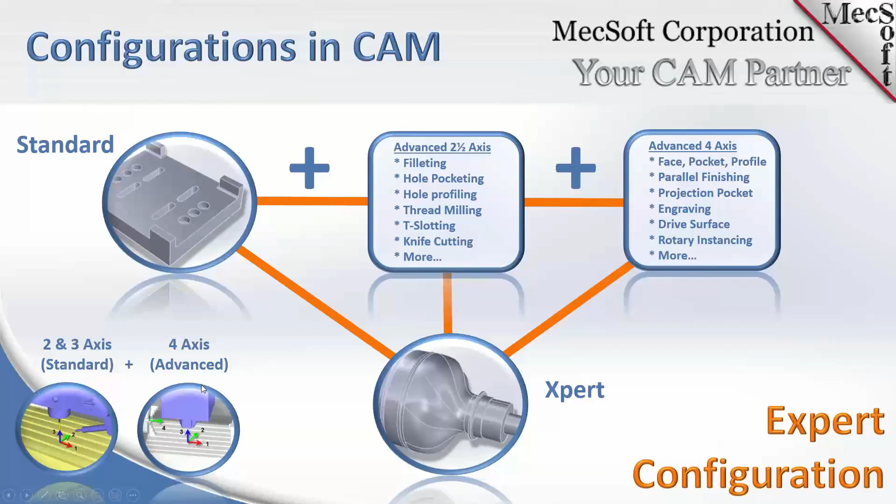So in expert, you get standard plus additional features that are in the expert configuration. Standard down here on the left, add to that 4-axis expert configurations. In expert, as we mentioned, you can cut radial parts, 4-axis parts.

Here is a typical 4-axis part that you would want to cut. I mean, you're saying radial, but typically people understand it as rotary parts. So if you have a rotary axis, then you'll be using this module.

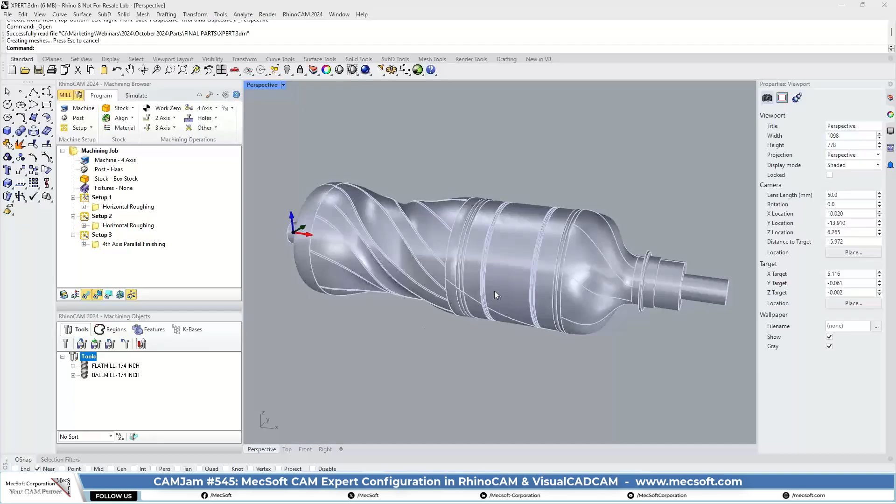So you can do some roughing, and these are indexed operations — we call that 4+1. We've got the parallel finishing with the continuous, that's the 4, and then these 3-axis operations refer to that as 4+1, or indexed 4-axis.

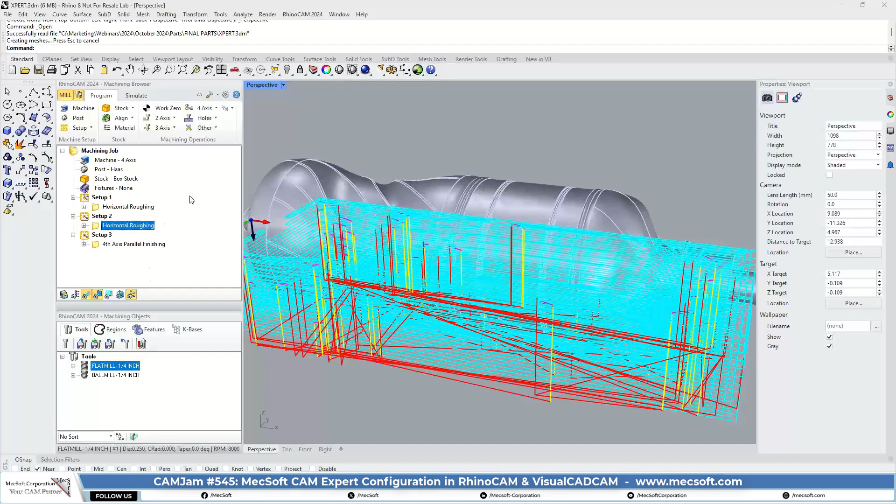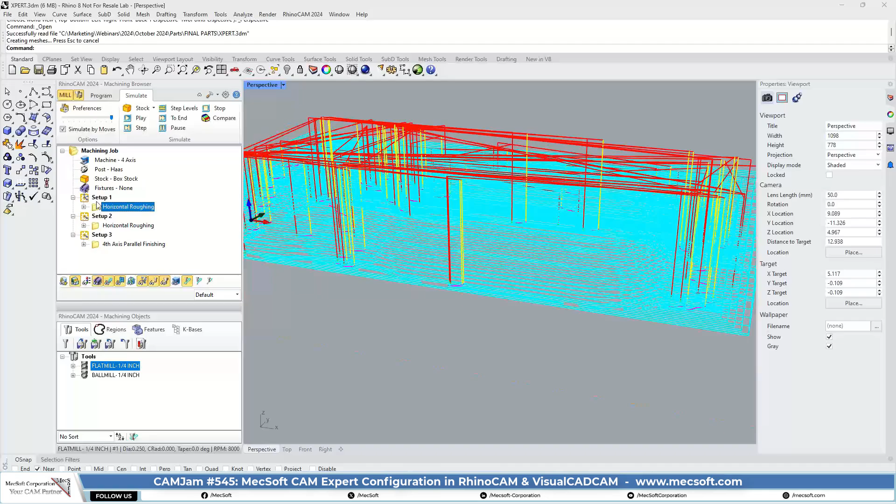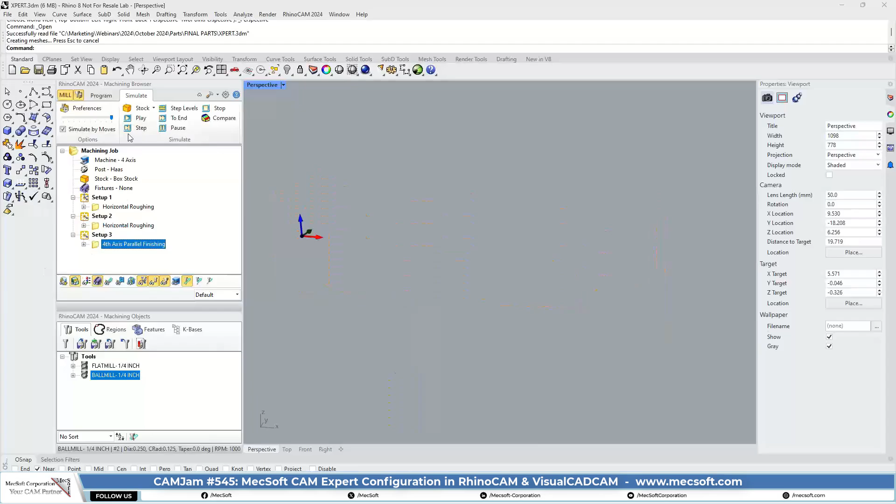Do you want to run the simulation real quickly on this to show it? Yeah, we can do that. So what we're doing here is we're actually locking the axes in the first setup, machining the top, and rotating the table to expose the bottom part, then roughing that, and finally doing a rotary finishing, complete continuous rotary finishing. So that's the top half, then we're roughing the bottom, and finally doing the finish, rotary finish.

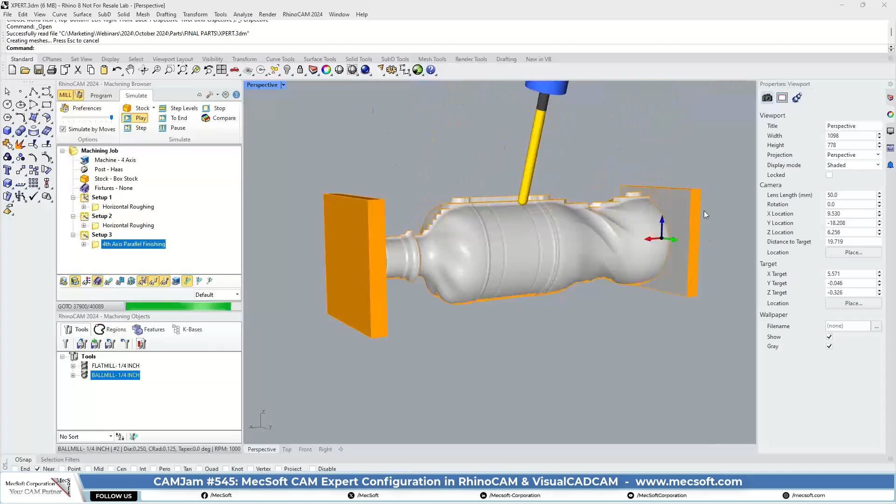And again, these lines you see are just in the simulation. Let's go back in here and turn these off.

So that's 4-axis. This module you'll be using for parts like this — people use it for table legs and machining, things of that nature. Anything that's rotary but has milling features on it. For instance, those little grips that you have on this bottle — obviously you can't run it on a turning machine, so you'll have to use a 4-axis milling machine. That's where this module will be used.

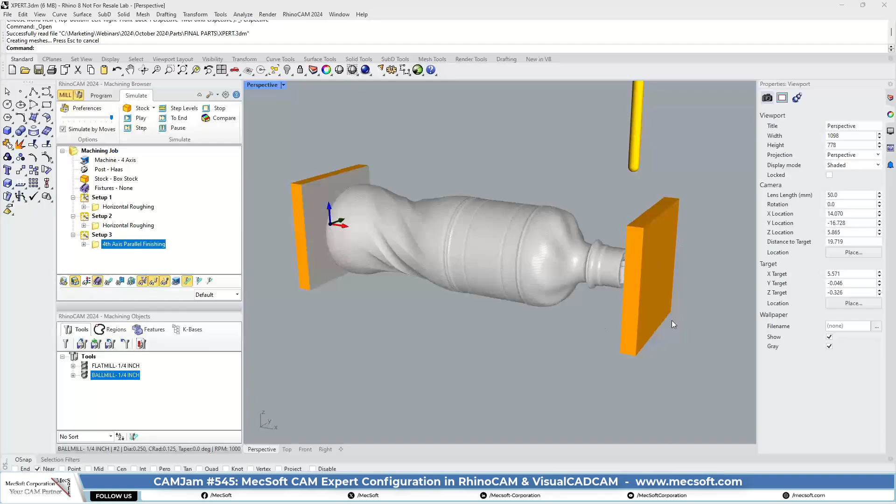So thank you, Don. Let's go over the menus real quick. Basically the same stock options, these are the same. In 2-axis, you actually get knife cutting — I don't think that was in the Pro or the standard. So you get additional knife cutting, hole profiling, and hole pocketing. If you need to machine very accurate holes, these are the two operation types you want to use.

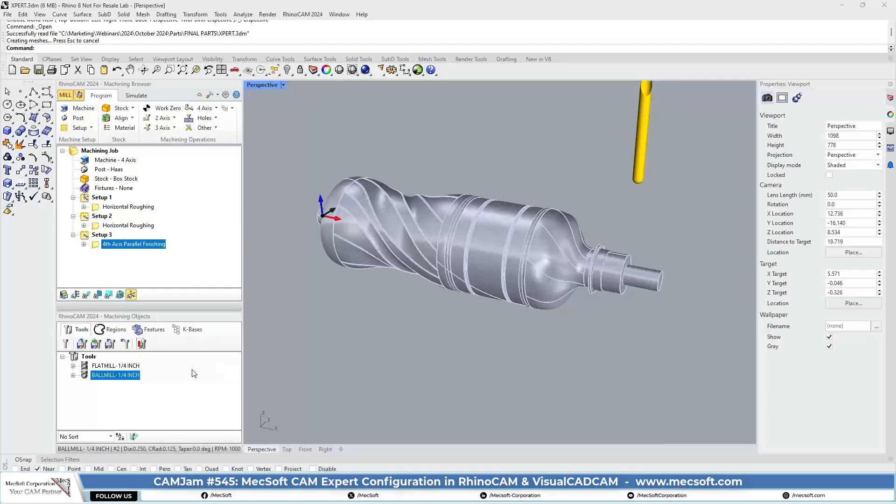So you get the basics of the standard 3-axis operations that are in standard. In addition to that, you get all of the 4-axis continuous operations, rotary instancing, and all of these different continuous 4-axis machining types. Again, you get all the holes, and then the knowledge bases, and the same operations down here.